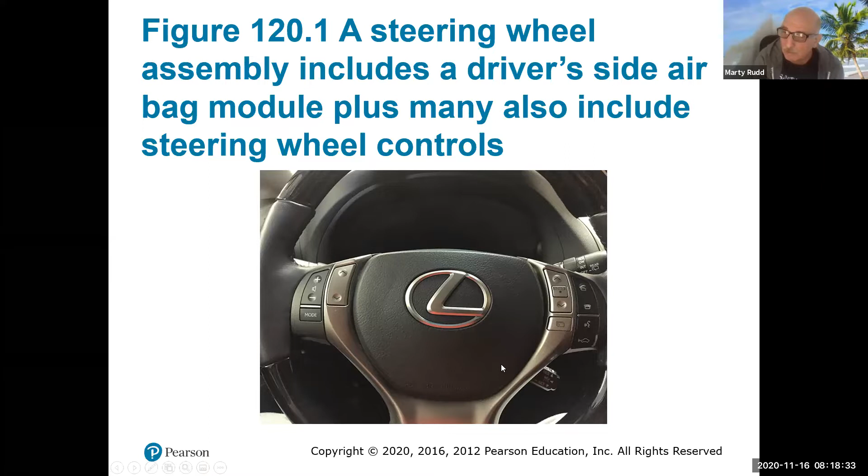So the airbag again is kind of a little cushion, and this cushion helps whenever you have an impact. It's not very good for side impacts, which are another scary thing. But more and more cars are putting in an airbag curtain that comes across when there's a side impact, and they're done by different little sensors throughout the car that sense that actual impact, and then they bring this information back to a module.

Now this module has to see more than one sensor saying, hey, there is an impact, because otherwise we might have a sensor that would fail and send off a signal that there was an impact when there wasn't, and then that airbag would go off, and that could actually cause an accident too. So they have put a lot of thought process into actually putting this feature together.

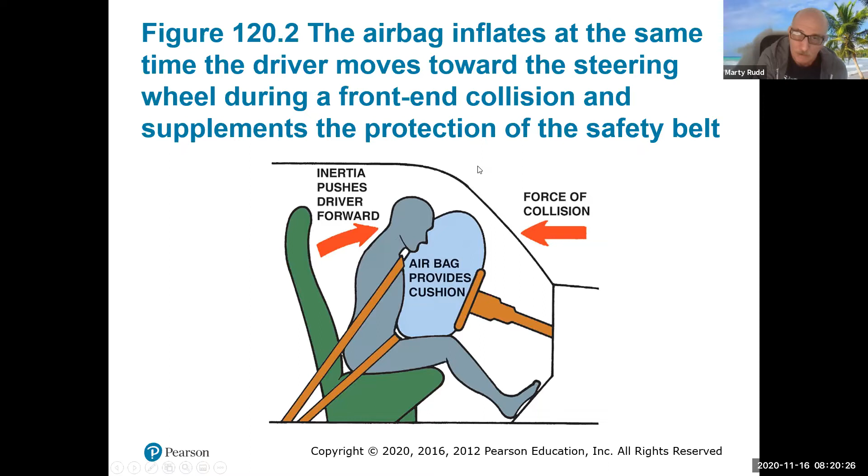Before airbags, before the collapsible steering wheels, we did have some injuries from front impacts and stuff like that. So this is just showing an airbag, and these go off very, very quickly. It's not like it takes a while. They sense, and they actually have the airbag inflate, and then it helps keep you from going forward and possibly crushing your chest or hitting your head. And it is all good stuff. All cars have an airbag in them, and a lot of them have air curtains too.

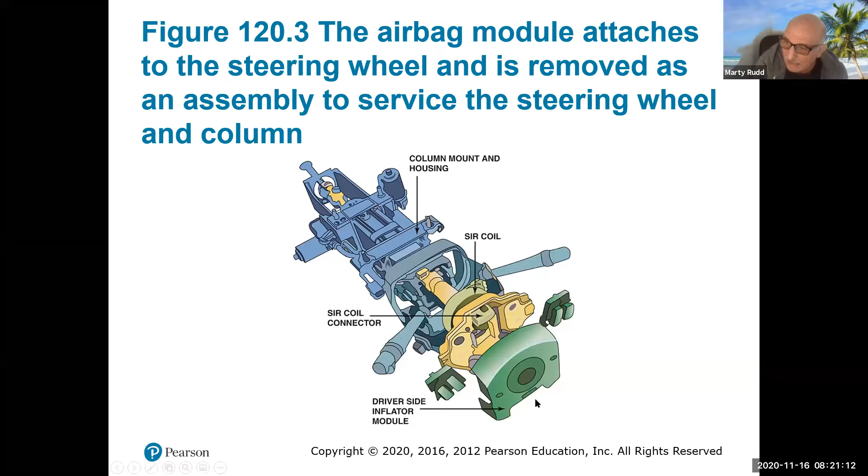It helps with your horn, and it also helps with being able to turn the wheel too. So it has all this inside that actual steering wheel.

The alignment, this is important for you folks that are going to be doing alignments, and you may have to take the steering wheel off for a service or so on. Even people who are just doing service work. You want to make sure you always put the steering wheel back in the same position. So you're going to be indexing that. How you do it is there's usually a set of lineup marks after you take the cover off the airbag and all.

And one thing about that airbag too, be very careful when handling it. There is a special procedure when you're actually taking the airbag module off of the steering wheel. If you do it incorrectly, you could actually cause that to inflate, and it is very scary. There's a big bang to it, and there have been technicians that have been hurt. But there's actually a safety protocol and a procedure for making sure that doesn't happen.

So you want to make sure you take that time and go through the actual information on how to disarm an airbag before you go much farther. And then you want to make sure the steering wheel is all lined up. Maybe you're doing some service work, and this is what you're going to do. You want to make sure.

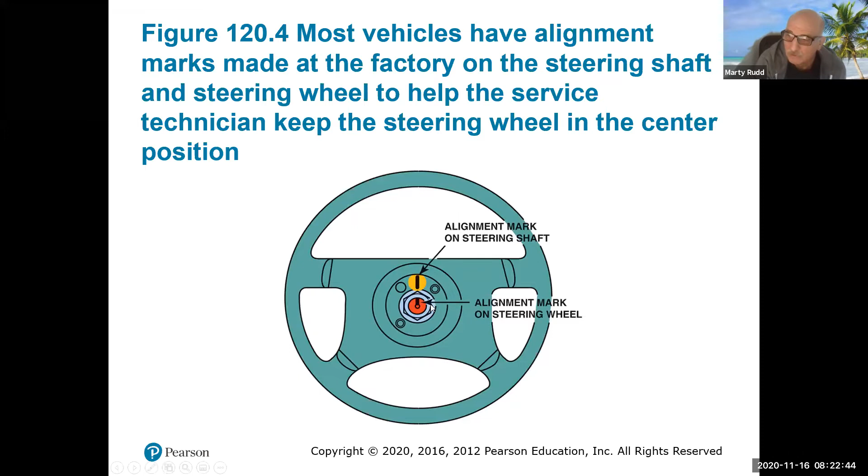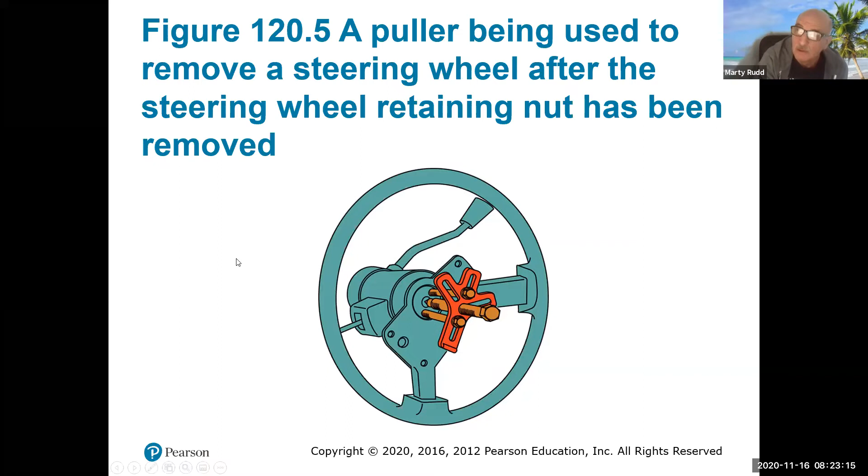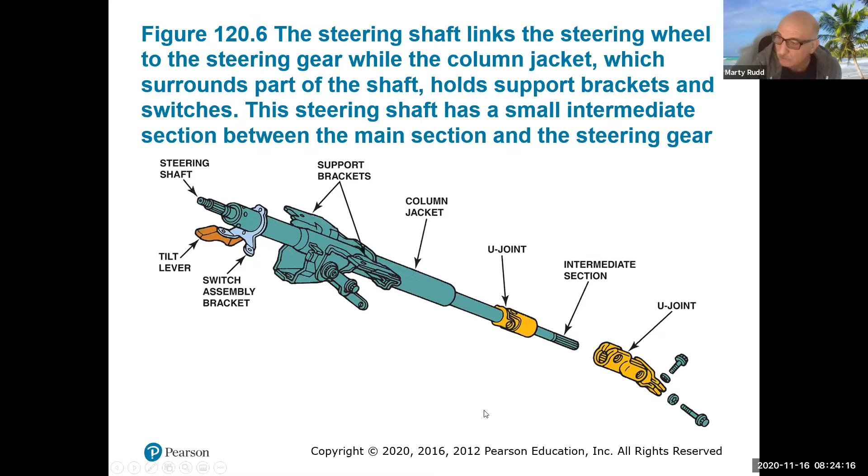And down here, because it's not solid right to the steering gear, there actually has to be a little bit of movement. And so we have a set of U-joints that allow it to pivot a little bit. Here's another one right down in the bottom here that's going right up into the steering gear itself. Here is another style, and this is just another way of doing it. This is just the steering shaft going into a different type of coupler.

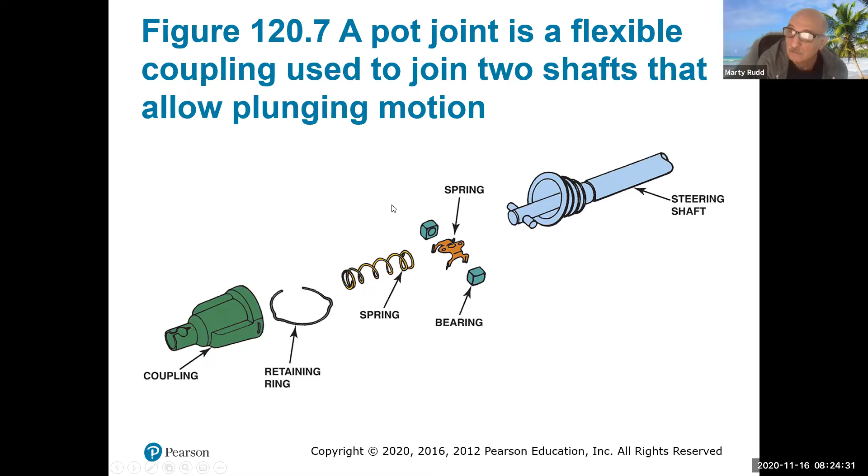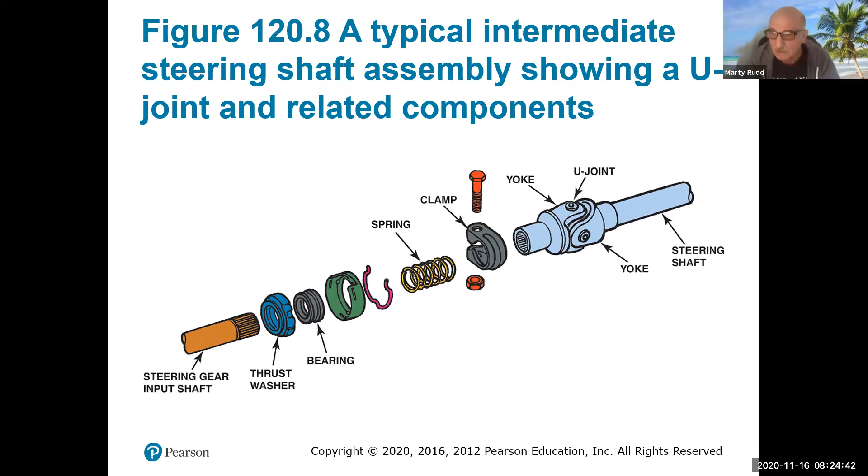And here's some more pieces to it. This is just showing you some different styles that they have out there. And believe me, not one fits all. And here is how it actually couples up. So here's your steering shaft going all the way up to your steering wheel. And this is where it connects to the steering gear. This one happens to be a rack and pinion type setup. So this is where it lines up to.

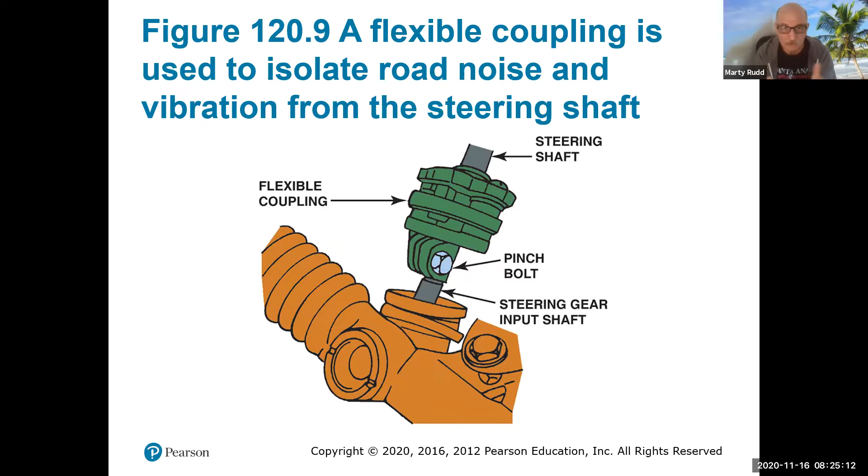This is where it takes this movement from here, and it causes the wheels to turn whichever direction you need them to go. And it's all mounted up into the dash. You've got to have some kind of support, and it's bolted. And when you're doing service work, you may have to drop this down to access some of the components.

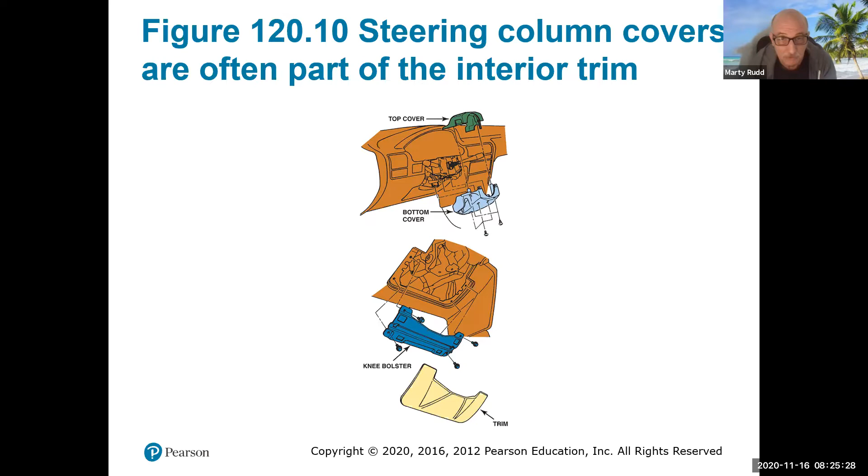And believe me, after a severe accident where these actually come into play, you don't want to just pound them out and straighten them up. It loses that ability to crush correctly, and you want to replace this. Unfortunately I've seen a few occasions, because the shop I used to work at did a lot of after-accident repairs for some body shops, and a few of them would reuse these things. They'd pound them out and straighten them up. That is not the correct repair.

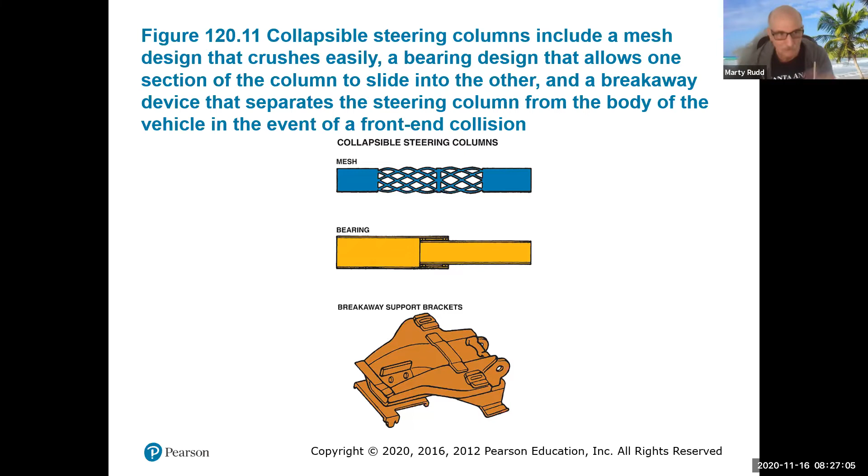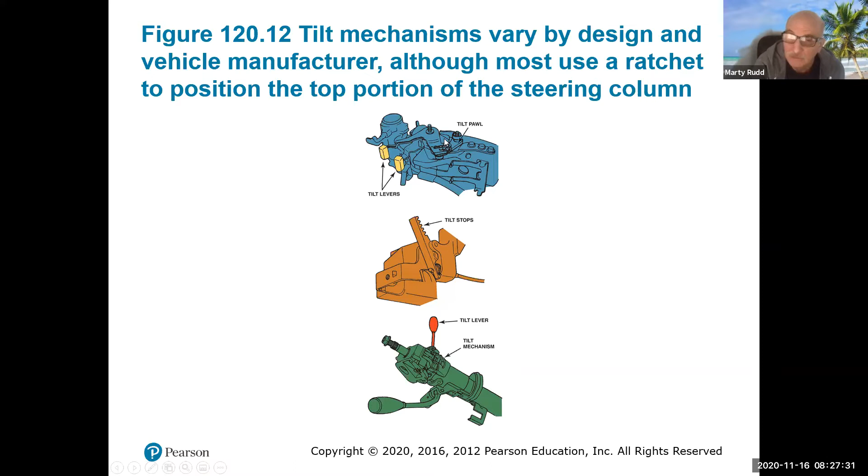Here are a couple different types of tilt mechanisms. This one is just a tilt lever down on the bottom here, and you push it or pull it, and it actually allows you to bring the mechanism up and down. Here is actually another tilt type, and here is another tilt. And here it shows a little tilt lever and shows you a little bit more.

Now, because of hybrid vehicles and electric vehicles, we had to develop a new system, and this system was electric instead of hydraulic. We originally had hydraulic or manual steering, and because of hybrid and electric vehicles, there had to be some way of allowing assisted steering, which is the power steering on this particular one here. And this is fully electric.

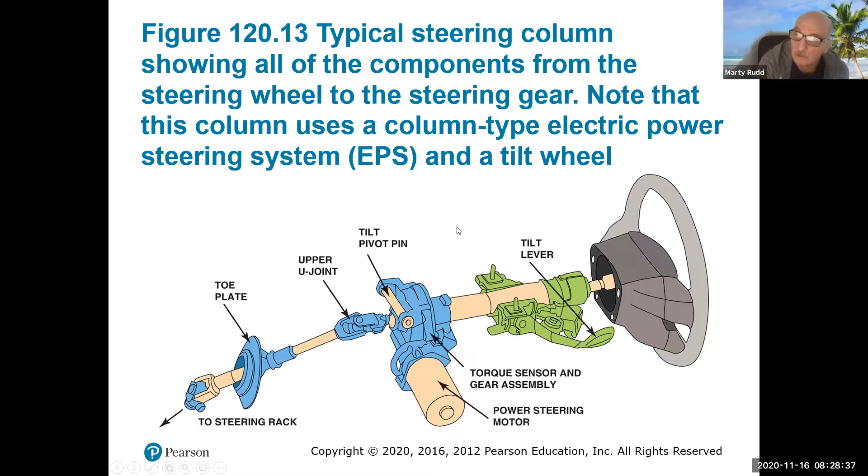And here again, showing you that actual shaft and the splines. Depending on the model, these splines may have a blank spline in them. What I mean by that is there would be equal splines going around, but there might be a double spline, and that would be the index for that steering wheel. Not always, but sometimes they have that.

So you don't have to worry about alignment much. But if your steering wheel's off, then you really need to start looking at the body itself. Did it get crushed? Also, you want to look at the alignment, see if something happened, and all that you would be looking at to get it back to a straight steering wheel again.

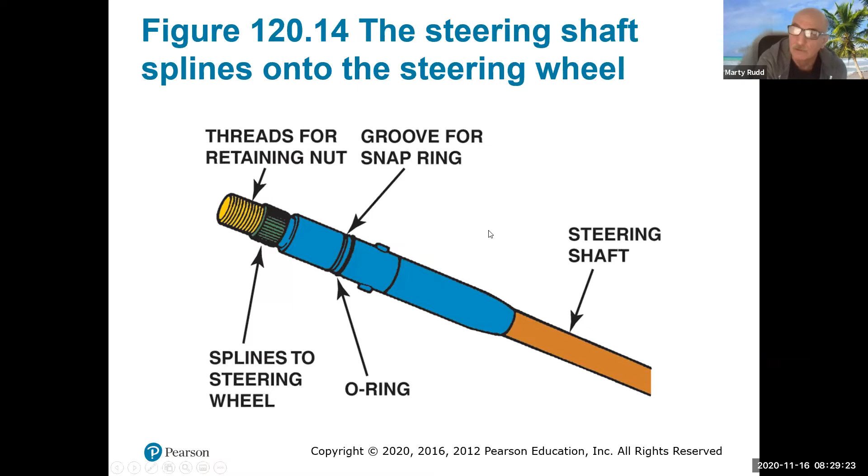Okay, this is again showing a little bit here. It's what they call a toe plate for the steering shaft, which helps seal out noise. You're going to have customers, hopefully not, that complain about noise.

And there was a cute little article I read not too long ago about not enough noise. Some people were feeling kind of sick when it was totally super quiet. Some of the Mercedes-Benz were so quiet that people were experiencing nausea because they were so used to some kind of noise. So Mercedes-Benz still had the seal, but they included a noise to make people feel a little bit better. A kind of cute little article.

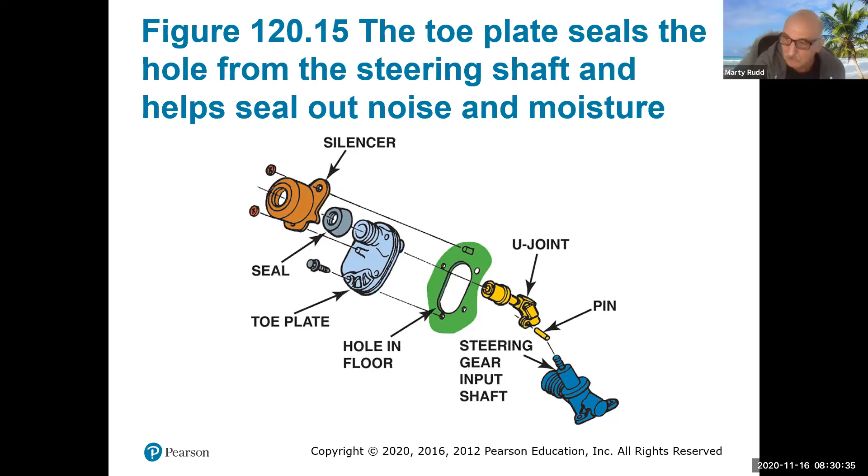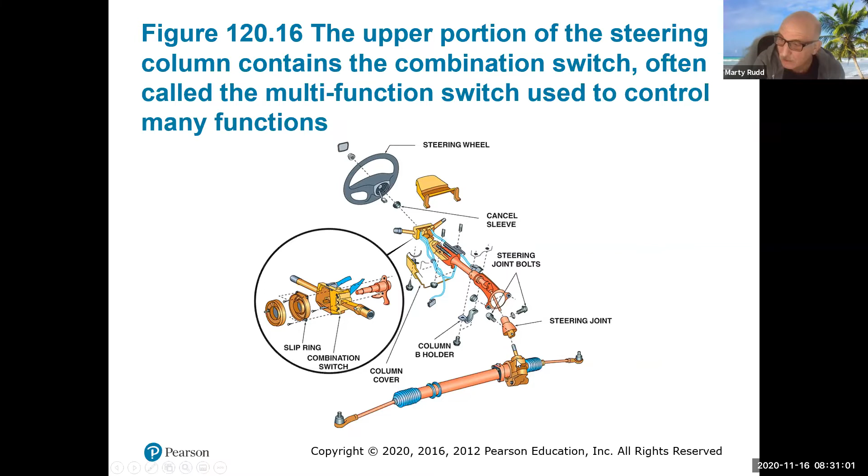But this is just showing how they can keep some of that noise and moisture from coming inside the passenger compartment. And here again is showing you the different pieces and how it's put together. It's just a little bit different, but it's still got almost the same stuff. You've got the shaft, the steering wheel, and all the covers. Covers are kind of the beauty part to make it look nice. And you've got your joints going down to your rack and pinion steering here.

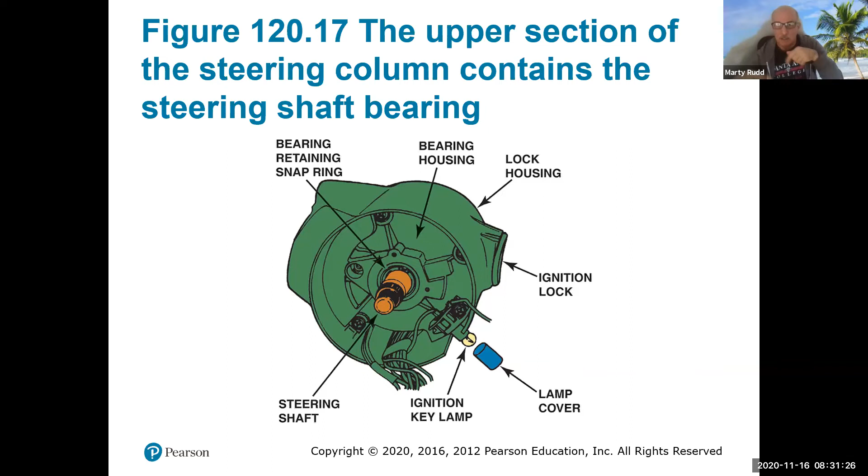And here's what they sometimes call the bowl. This is where the bearings are inside the actual steering column. You need something to support everything, or else you get a bunch of banging, especially when you go over bumps. So these bearings keep the shaft straight and allow you to spin it with a little bit of ease.

And this is showing a lock plate. This is for your anti-theft. I know nowadays most cars are push button, but we had steering columns with a turnkey on the actual steering column. You put it into the off, lock position, and this would cause the lock plate to go into play and lock up the steering column.

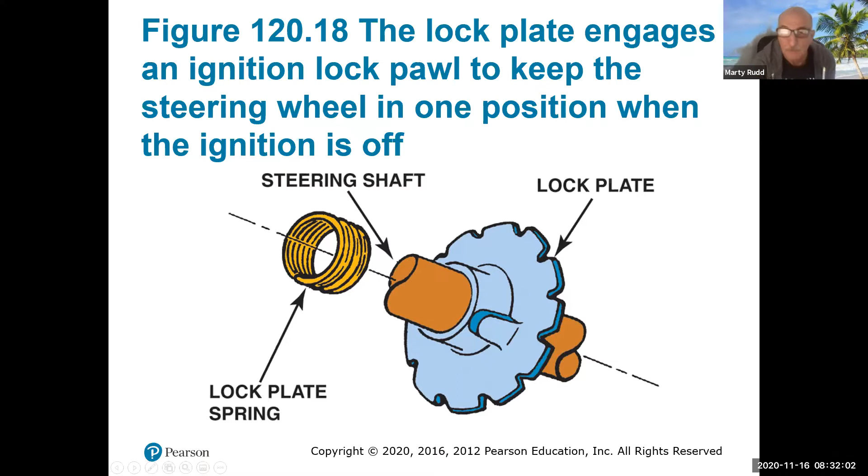And this is showing you the steering gear itself and how it works. This is a steering box versus a rack and pinion, and it has a little worm gear inside. You'll really get more into it when you get deep into your suspension and steering class.

But in a nutshell, what we're doing is we're taking and spinning this from the steering column, and this is actually changing that motion to, instead of this way, it's changing it to a rocking type motion, which actually causes the linkage to go back and forth. This next slide actually shows a little bit better.

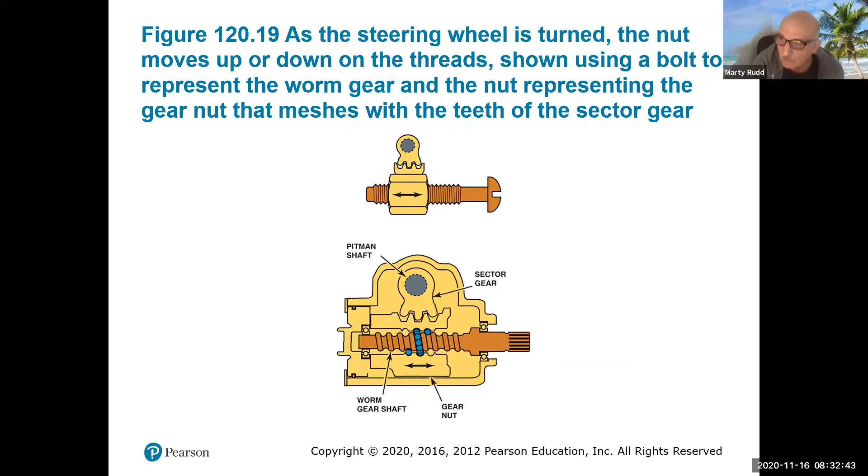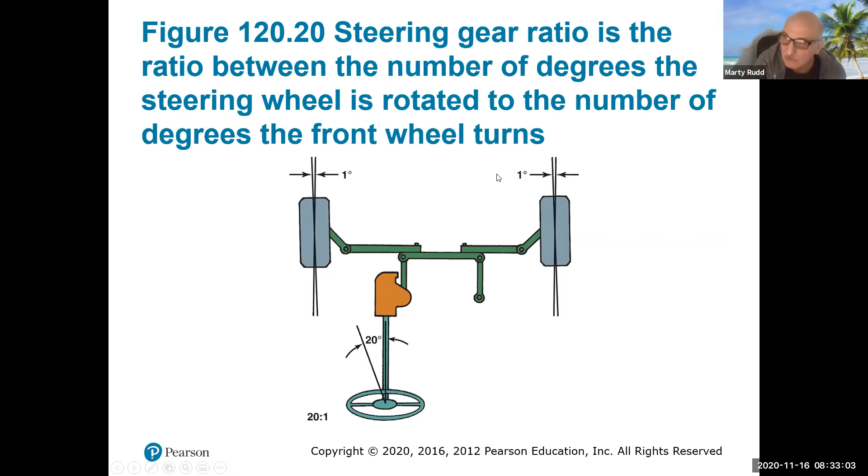So here I'm spinning it, and by using this linkage affair on the steering box system, I'm actually moving this back and forth. Instead of spinning, I'm going back and forth here, just causing the wheels to go back and forth. And this is showing one of the pieces inside of it, what they call a sector shaft.

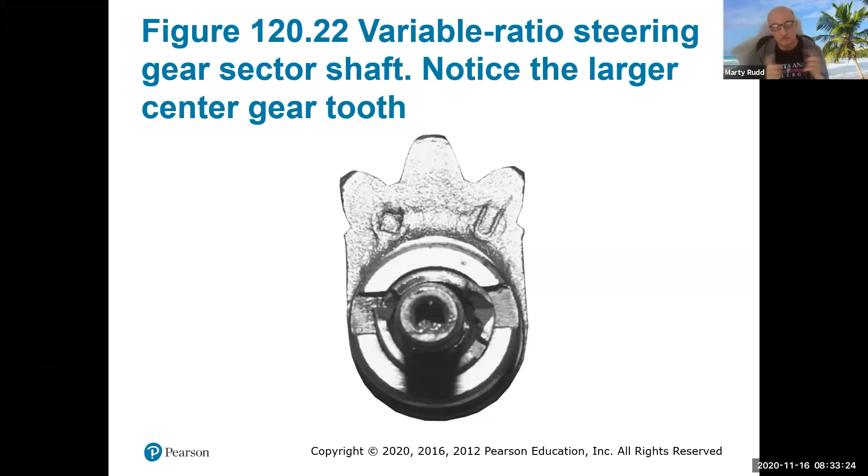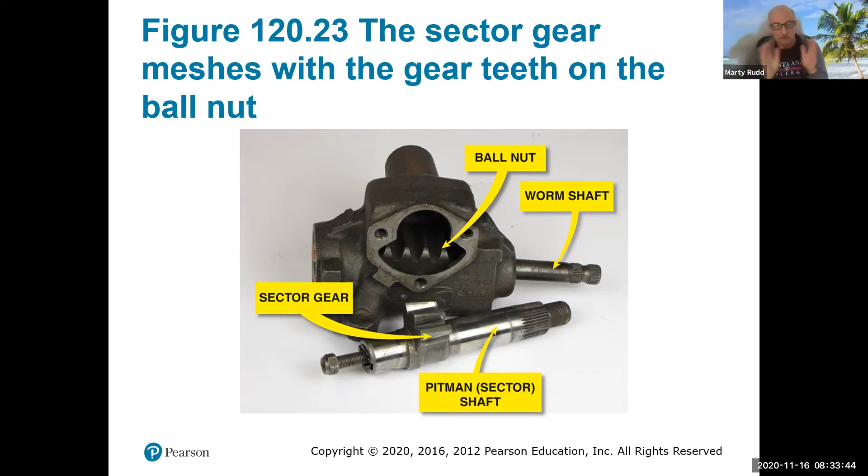And then, here we go, a different ratio. What they mean by that is you can have sports steering or standard steering, and it's just how fast it actually causes it to go back and forth. This is what the steering box looks like with the sector shaft and all. So here's my pitman arm, and here's my sector gear, I should say. And then here's the actual gear that changes that rotation to a back and forth type motion.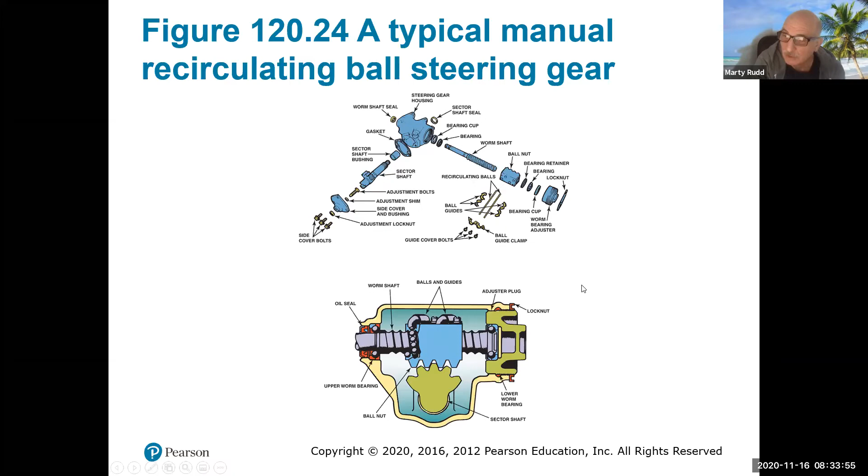Again, just showing you another blown up picture of the actual steering gear all together here, which really does help show you where all the different parts are. They use a bunch of balls and bearings inside, and these bearings, like before, actually allow it to go smoothly.

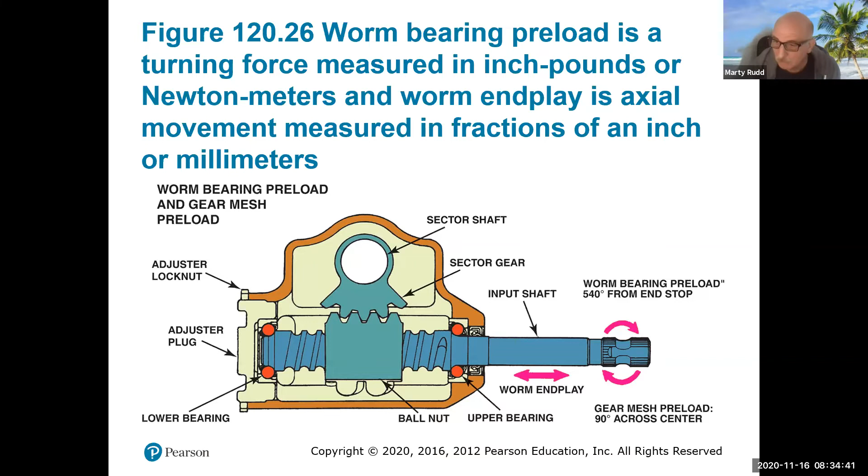And this gearbox is packed depending if it's a manual steering or a power steering. This is the hydraulic type one. We actually have fluid inside of it to help with lubrication. If it's a manual steering, they usually pack it with a grease to help keep those moving around nice and smoothly.

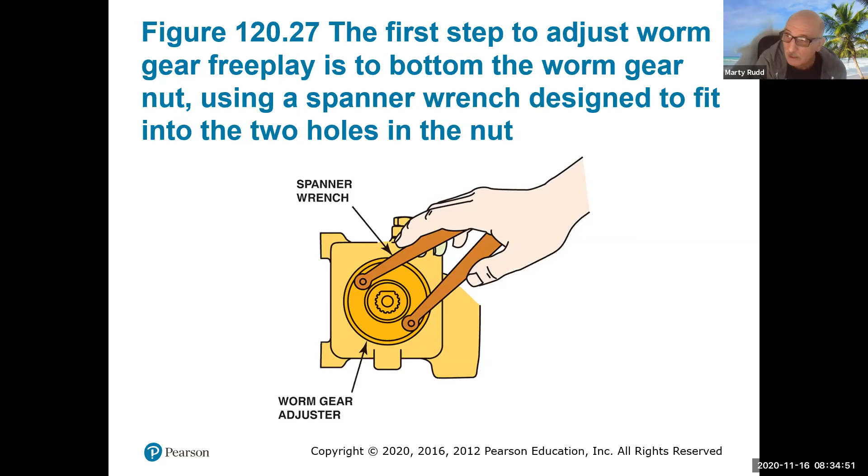This is where they're setting up the steering box, using a spanner wrench. And it's showing some of the measurements that we do to make sure that it's locked down in place. So this is kind of like a little bit of a lock. And again, they're setting up the adjustment on the worm gear. We don't want too much movement up and down when we're going through this part of the steering, so we're kind of truing that out a bit.

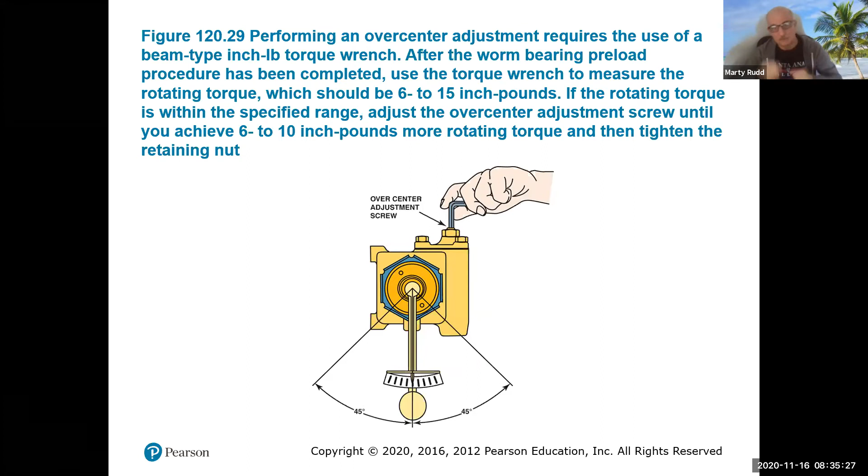You've got to have a little bit of motion so the grease or the fluid can actually get in there to help lubricate, but you don't want too much or else you have a lot of play in the steering wheel. Again, they're showing another, talking about the end play.

And then rack and pinion steering is a little bit different. We get away from the gearbox that you've seen earlier. This is a different setup, which is, I would say, more efficient as far as steering goes, and it has a better response, because with the power steering box you have to go through a bunch of linkage to make things go back and forth.

So you're thinking about all these wear points. As a mechanic, that's what I'm thinking about: what can wear out? When you have all this linkage, there's a lot of stuff. The little balls inside the linkage can actually wear out if they're not lubricated properly. And when you go into rack and pinion, it's a little bit different.

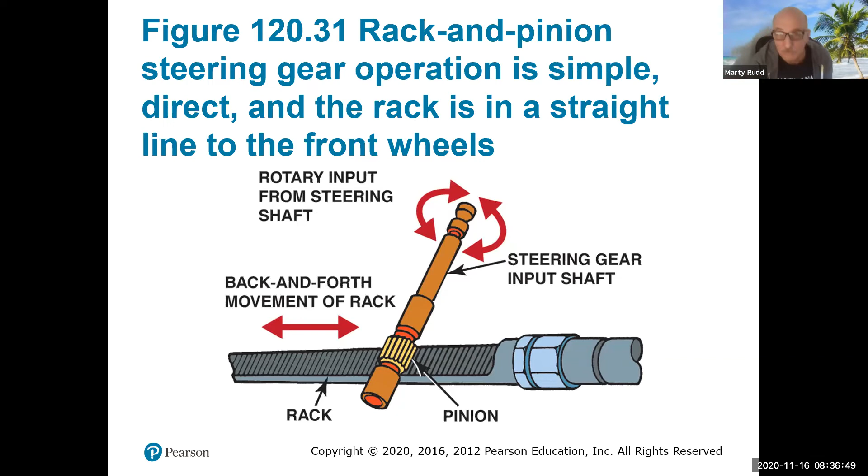Now, instead of having a motion going through linkage, I'm actually doing a motion directly. And this is how it does it. From the steering shaft, we're coming on down to an actual pinion, and this pinion has a rack, this rack here. So that pinion rides on top of it and it actually moves the wheels back and forth through this little shaft assembly. So really simple in a way, but it does give a better response.

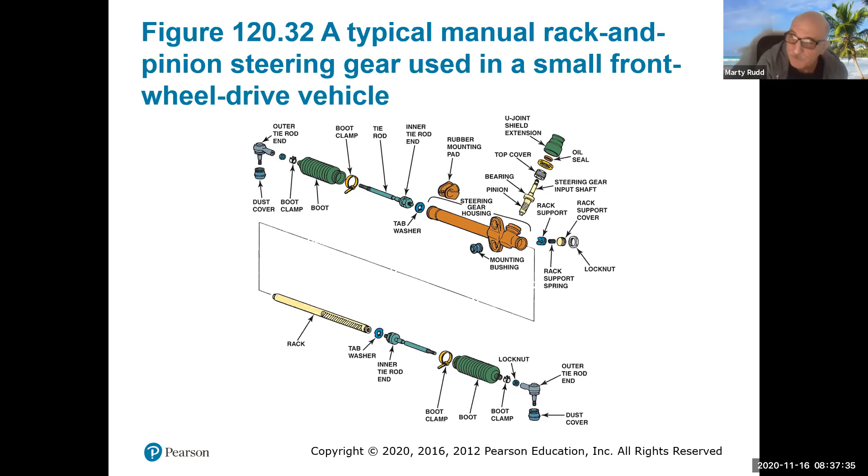So instead of having all that linkage, all you have is some rods going out, and these rods go to a tie rod end, and it goes to the steering knuckle. So there's really less stuff to wear. I'm not saying it doesn't have wear points. The inner tie rod can wear, the outer tie rod can wear, and I wouldn't say they're easier to find when you're doing your inspections, but it is kind of a simpler system. And this is just showing again how they load up the rack to make it all work.

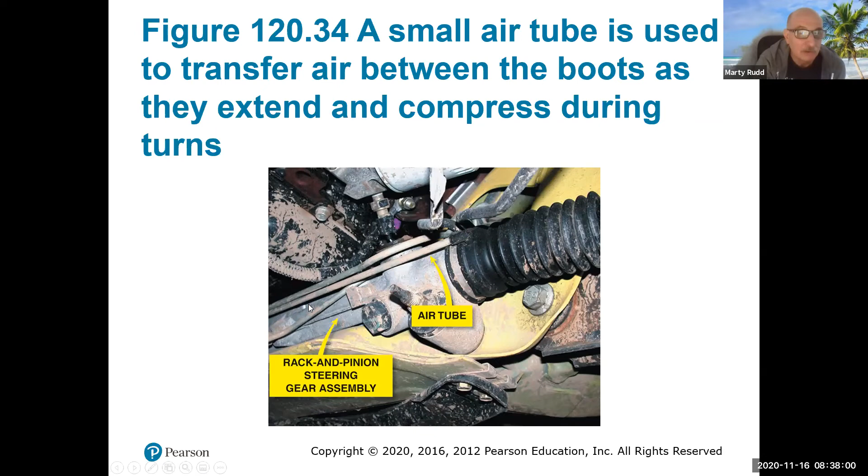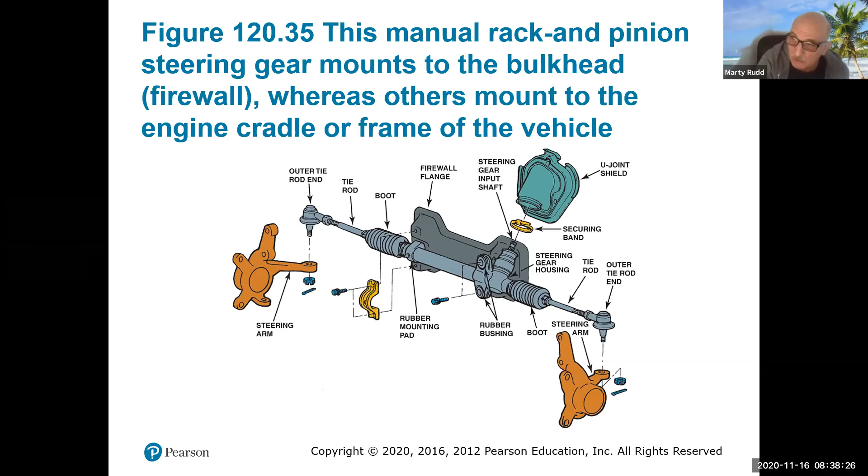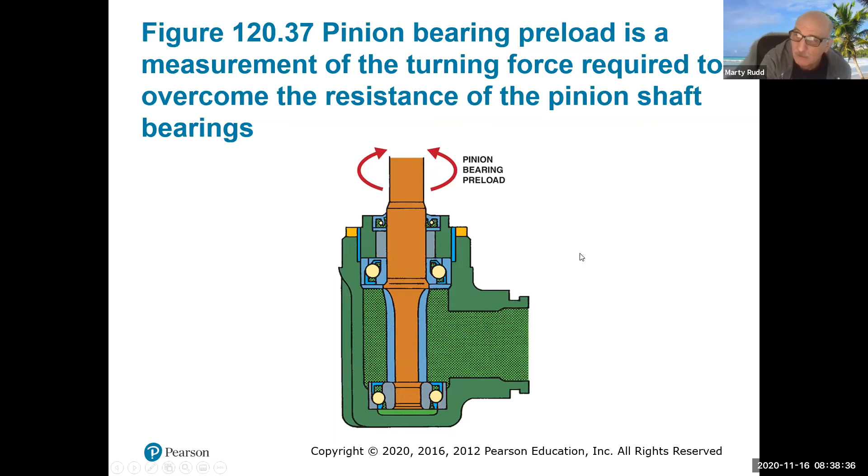So this is one way, and here's that steering arm or knuckle, as they call it. This is where it goes out to the wheels, so you can see how much simpler it is. It just spins it back and forth. Another way, showing the pinion torque on it. And it's again showing some bearings, and here's all that preload. And this is actually showing one of the adjustments that we can do on them to make it a little bit better as far as our steering goes.

Again, a lot of this stuff is set up by the factory. You really shouldn't have to make these adjustments. If you're having to go in to make some adjustments here, I would really look at that rack as probably having some fault. Normally from the factory on out, they're pretty good for longevity, but after a period of time they do wear out, and there are signs that they're wearing out. Let's put it that way.

Those bellows can fill up with oil because the seals are leaking. Or if you have an electric steer, you'll see signs of it not working, or being very stiff in the morning to go from one side to another. That's a dead sign of the steering gear pinion going, failing on you too. So there's all kinds of different ones.

You'll learn more about this in your suspension and steering classes, but this is what I wanted to share with you on columns, steering boxes, and the hydraulic versus the electric. We'll go more on the electric in just a little bit here, but I wanted to show you some comparison of them all. So this is it for this presentation.